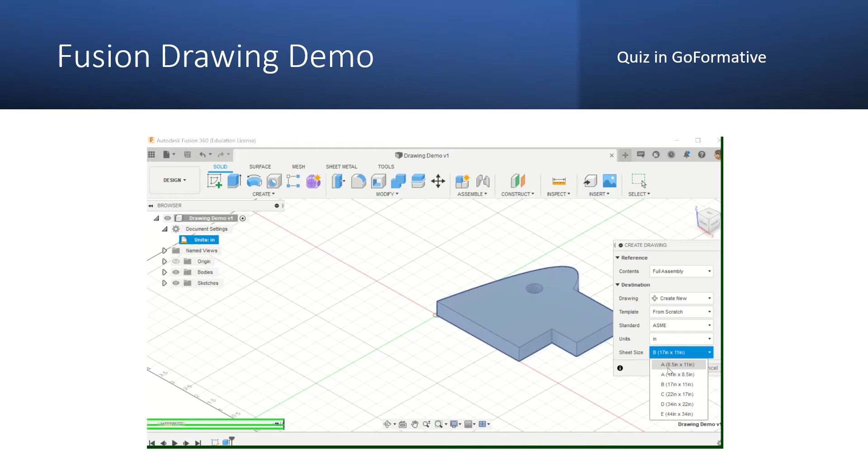So I'm going to have this oriented, I guess vertically. We'll do 8.5 by 11 and click OK. And it's going to take a second and bring this up. Now, I'm not entirely sure why it's doing this. This is a little bit new where it's floating my design there, and it says place the base view, but this isn't the view that I want for the front. So if you're looking at this, it says this is going to be my front view.

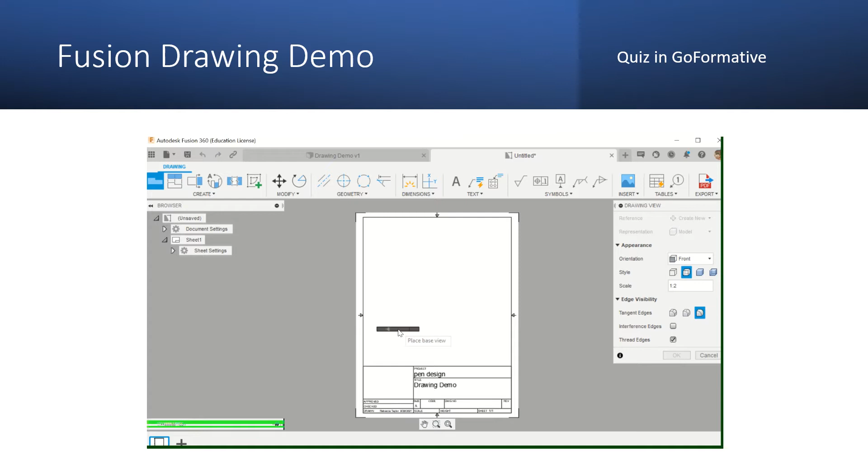But remember, when we're choosing the front view, we want the longest side, but we also want the face that's got the most distinctive profile. And if you're looking at this, it's a rectangle, so it's definitely not the most distinctive profile. So I'm going to come over here and pick what it was showing as the top, but I'm going to make that my front view because that's the right choice for the front view. And click to place it, and then click OK. And notice that it is giving me just that front profile view there of my weird little design.

Up here in the upper left in this Create panel, we've got the base view. That's what we just did. Okay, and your base view is going to be your front view. So click base view, and then you can place your base view if you get in here and you start clicking around and you're like, what's up with that? All right, now we need to get the top, the right, and the isometric.

Now, doing this by hand can be challenging to picture where are the hidden lines, where are the holes, how do we get everything lined up? But Fusion will do it for us. So we're going to click on Projected View. Okay, and you can read the description. It creates projected, orthogonal, and isometric views of the design. Select a parent view, then place projected views as required. So we're going to click that. It asks me to select the parent view.

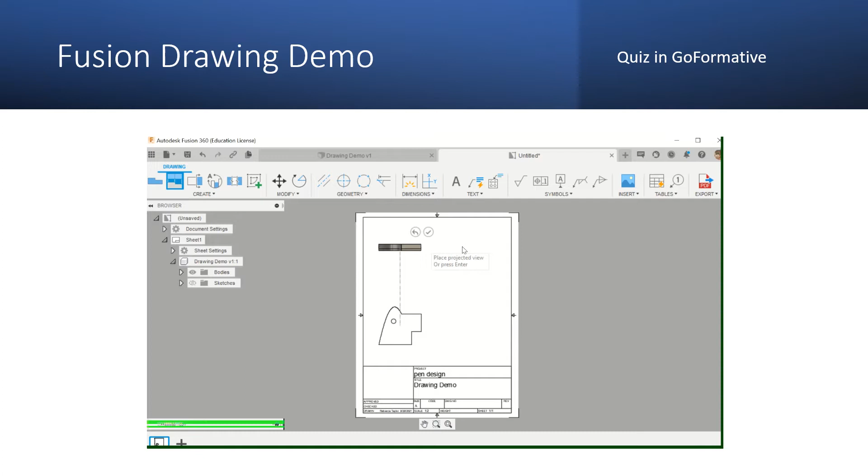So when you're using Fusion, Fusion has a lot of things in it that will help you. The little dialog boxes, the things you can hover over, but you've got to slow yourself down and read them. So select the parent view. Now I can just drag my mouse up to the top. It automatically does the top view. I click my mouse to place it. Then I move my mouse over to the upper right corner. It automatically generates that isometric with the front, the top, and the right-hand side. Click my mouse to place it, and then bring it down to the lower right.

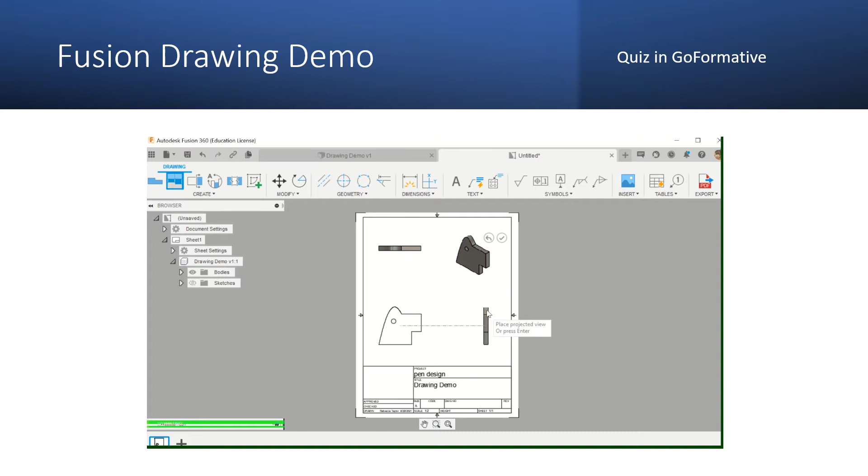And when I get down here, like you guys can't see what I'm doing with the mouse. You can kind of see the arrow. Maybe you can see the arrow moving up and down, but it's not actually moving the object up and down, and that's because it's locked in because of that front view. And then I'm going to click that to place and then exit out of that by clicking the green arrow.

Okay, now just to note that I'm going to click my front view. Notice that when I'm clicking and dragging my front view, the top view and the right view automatically move with it. That's that idea that it's got to be lined up perfectly. So if I drag my front view down, my right view has to go down with it. If I drag it to the left or to the right, the top view has to move with it.

If I try clicking on the right view, it will let me move it side to side, but it's not letting me move it up and down at all. And that's that multi-view, the fact that everything has to line up. Now, before we move on, take a look at the different lines in this, because we talked about line conventions, and on the afternoon I'm recording this, we had just done the multi-view drawings, and I made a lot of comments on the worksheets about the different lines.

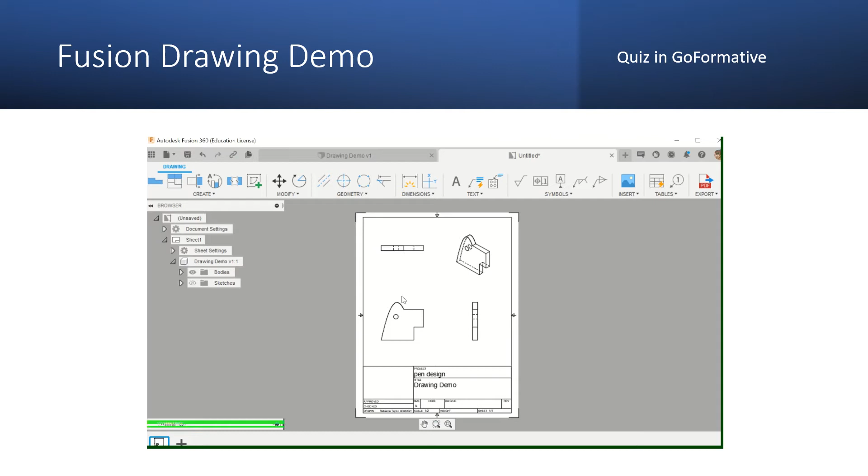So looking at this, you can see that there are these two hidden lines that are dashed in that top view. Those two hidden lines line up with the hole. They don't tell me what the detail is. It just tells you something is there. Then there's a solid line. That solid line lines up with this edge where the arc meets the horizontal segment. And then we have another hidden line, and that corresponds with this edge down here. Can't see that edge from the top view, but it tells you that there is something happening there.

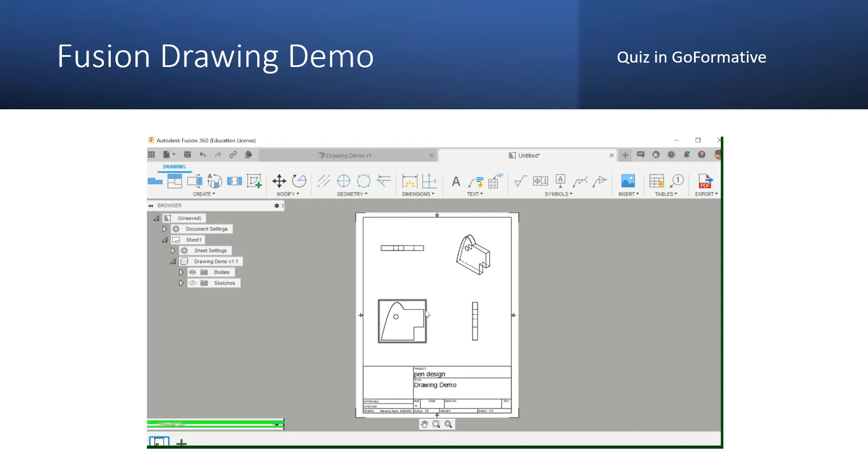Looking at the right-hand view, we've got a solid line representing this edge right here, and you can see that edge from the right-hand side. We have the two hidden lines showing that there is a hole there, and then we have that bottom edge that's visible from the right-hand side. And so Fusion will get all of those lines right for you.

Now, typically with the isometric, there's different ways that you can choose to view it. So I'm going to right click on the isometric and click edit view, and it will let me change the appearance of the isometric. And so I'm going to choose this one that will give the appearance of the solid object. Also note the scale on that, like what kind of scale you're using. So if you're in geometry and you're doing any kind of work with proportions, all of that math comes into play. So I'm going to close that out.

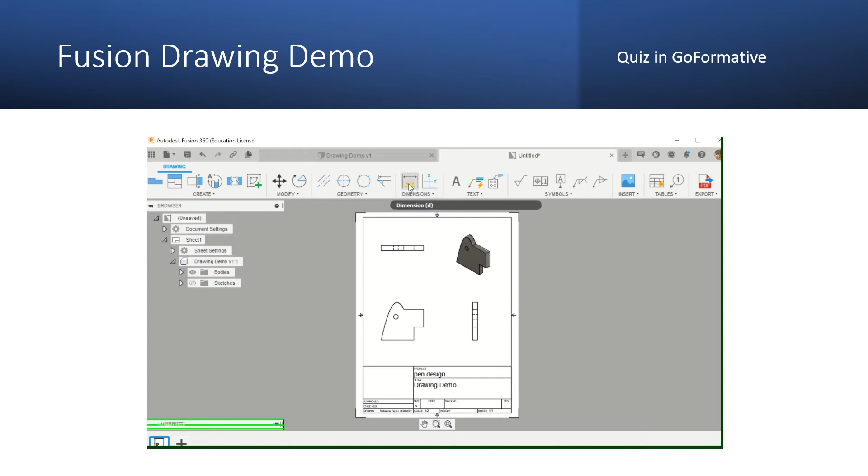Now, the last thing I want to cover in this is dimensioning, and there are all kinds of rules for dimensioning on a drawing, and we will cover those rules in class. Like, you cannot dimension to a hidden line. You have to have everything dimensioned, but not over dimensioned. So we don't want to put the same dimension on there twice. Just like in design mode, when you're in the drawing part of Fusion, you get the same little icon there for dimensioning.

I'm going to zoom in. And it's not letting me pick what I want. Select an edge or specify a point. No, that is not what I wanted to do. Let me come over here. Oh, there we go. Okay. And so I just clicked on either end, and the default is in inches. Now, when I go to drag this, I'm going to drag it down far enough so that it doesn't get in the way of anything else I want to dimension. I might also want to dimension this.

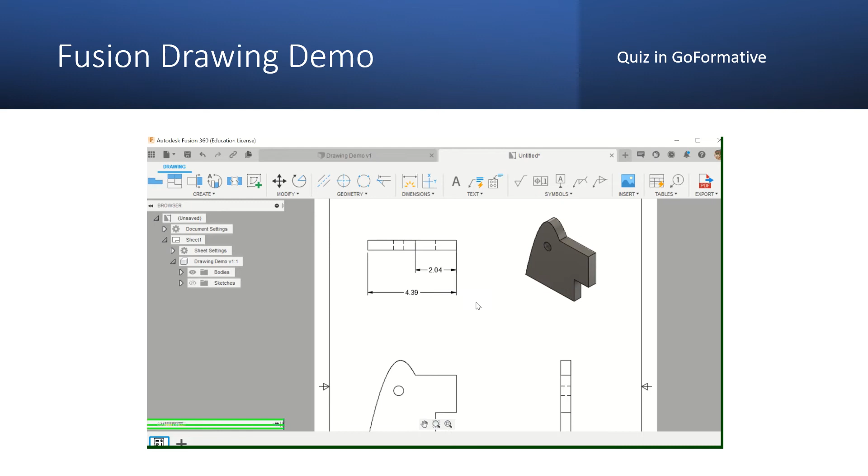Okay. And when you're dimensioning, you want to make sure that you don't cross your dimension lines. So you don't want to put it like this. Let me see if it'll let me move it. Nope. You don't want to do that because that's confusing and you got the lines crossing each other. So when you're placing your dimension lines, you want to be intentional about it so that everything that you're dimensioning is really clear. Now, I chose to dimension the width on the top view because there's no great place to do it on the front view.

All right, now let's say I want to dimension the height. I'm actually going to do the same thing over here. I'm going to click and then drag that out.

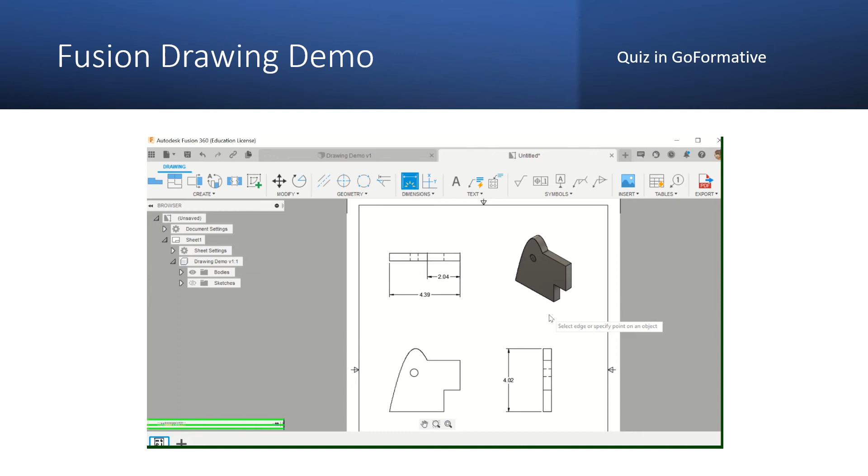And you want to make sure that you're not over dimensioning. So for example, if I click here and I dimension that to 1.9, but then I click here and here, that's called over dimensioning, because that's actually the same thing. I dimensioned the same piece of it from the front and from the right hand side. So you don't want to do that.

You want to make sure that you don't over dimension anything. You also don't need to dimension more than, like, for example, if I dimension from here to here, okay, I don't need to dimension this part from the bottom, because I know that they have to add up to 4.02. That's actually a little bit crowded. I don't like that. It was just a little bit crowded for me.

This has definitely changed last year, like some update that they ran. This is not running the same way.

So when you're dimensioning, you do want to make sure that you don't over dimension, you don't under dimension. Everything has to have that measure to it. And I think you do want to pay attention to how it looks visually. So that's a lot more comfortable to look at than what I did before, trying to cram it up there. And you implicitly know what that dimension is, because you know it has to add up to 4.02.

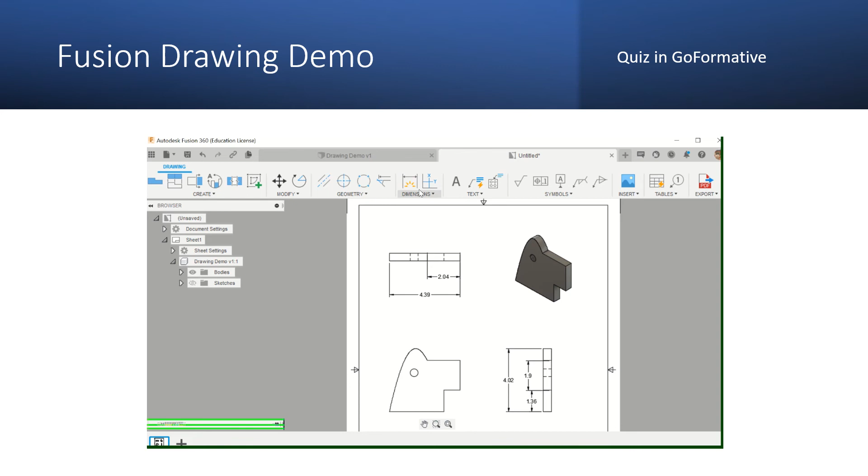Now, one of the rules of dimensioning is that you have to keep all your dimensions in the inside space here. So what we don't want to do is click on that circle and drag the dimension for that circle out, but it's not letting me. It did it for a second. There we go. Okay, there we go. So we've got the diameter of the circle.

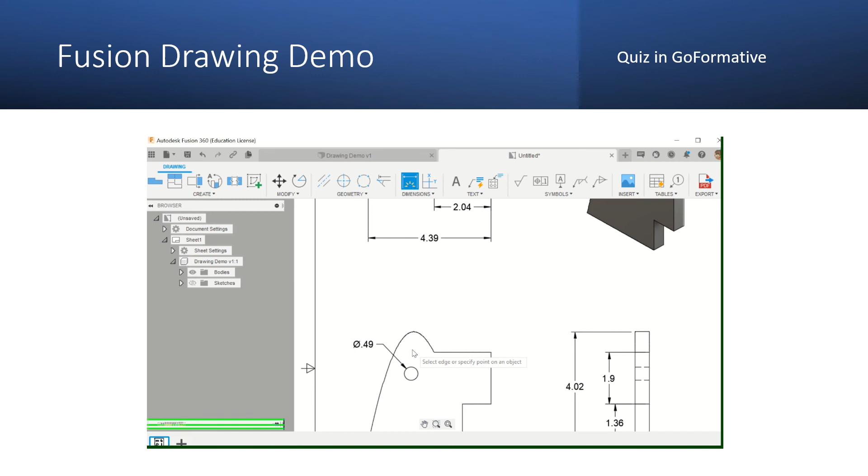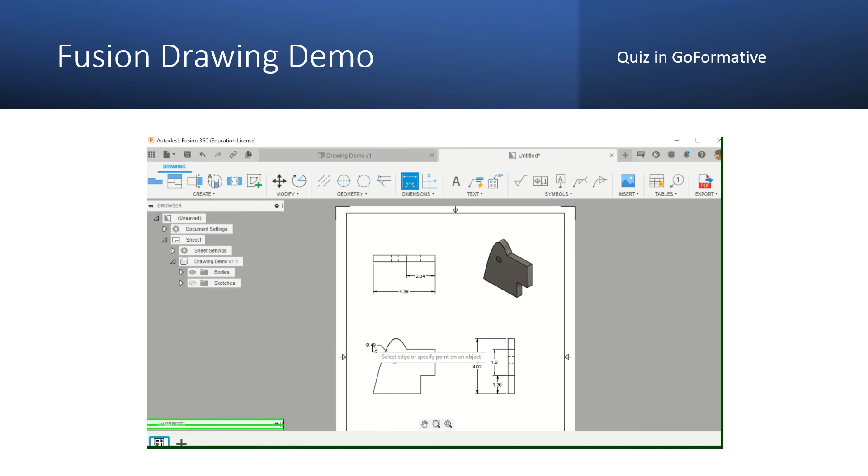We want to try to avoid dragging it to the outside. That's just one of those rules where you're not supposed to dimension in the margins. So that's why up here, I dragged it down instead of dragging it up, and I dragged these in instead of dragging them out. Now, I would like to move it. It's not letting me select the object. Okay, I'm not going to waste any more time with it. So I would want to place it over here in the first place.

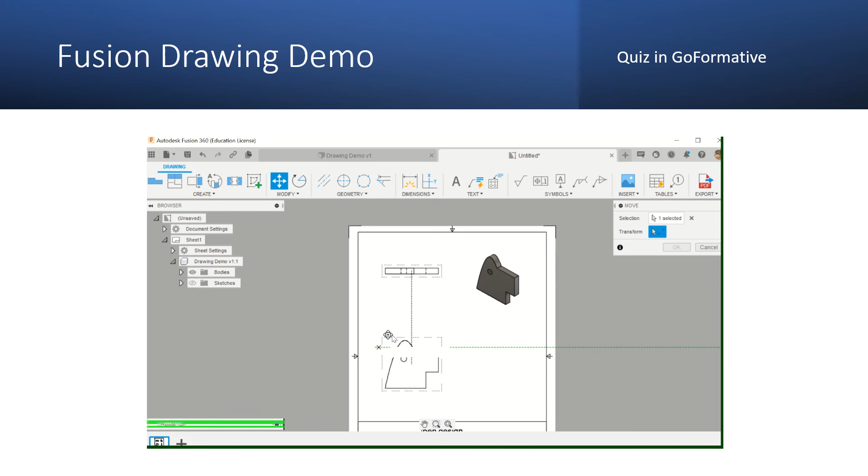Now, it's not a hard and fast rule. There are times when you might put it in the outside margin. You just need to be prepared to explain why you made that choice. So I might pick this segment right here and put it in that outside margin.

And my reasoning would be, well, to place that dimension up here, I would have to cross the dimension lines all the way across. Let's see if it'll let me do it. That's just messy. And it also creates this other line here that you can't distinguish from the object line. So we really don't want to do that if we can help it. This definitely does not work the same way it did a year ago.

So you would explain, I put the 3.37 in that outside space because there was no good place to put it. There was no good way to get it onto the inside. But if you can get it on the inside, you will.

The other big thing is that you cannot dimension to a hidden line. So this dimension right here, the 1.36, has to be dimensioned on either the right or the front. You cannot go in here and try to dimension that from the top view. I'm actually not even sure you can get it from the top view. Yeah, you can't even see it from the top view. But see where the circle is? You have to dimension the circle from the view that shows the circle.

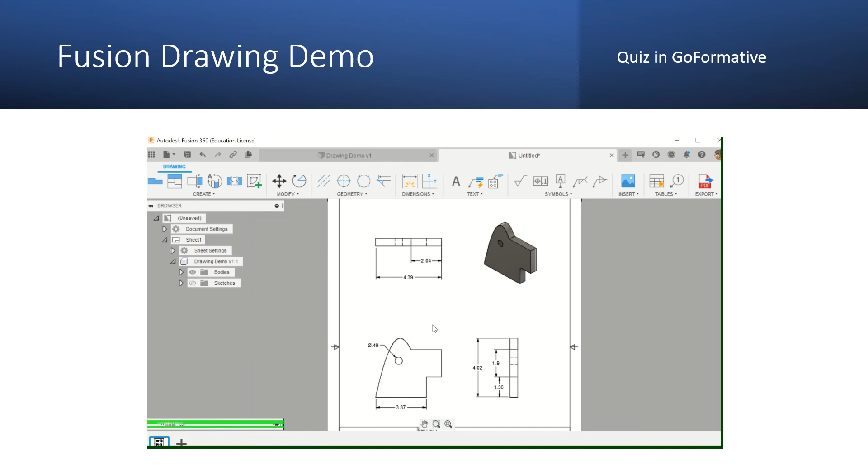So that's how you create a drawing in Fusion 360. Your task is going to be to create a drawing from our little steps with holes, and to get everything placed and hopefully to get it dimensioned without violating any of the dimension rules.